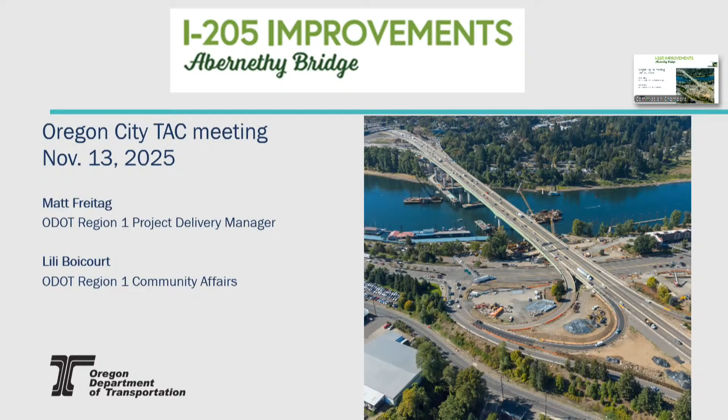So anyway, here is our bridge that we all know and love, the Abernethy Bridge. We've been in construction for about 3 years now, and got a little over a year left, and that's a very familiar sight. I'm going to turn it over to Matt in a second, but I just want to remind everybody the main part of this project is to make the Abernethy Bridge earthquake ready, and that's what all the big machines and all the reinforcement and all the columns and all the work that you're seeing there is really about: that earthquake resiliency.

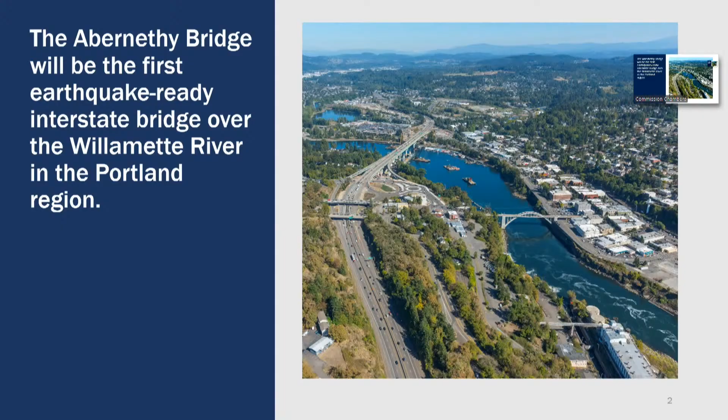Once it's finished, it will be an emergency lifeline across the Willamette River. So this is something that will serve the region in the event of a major earthquake. So I'm going to turn it over to Matt, and he can introduce himself and go through the rest of the project.

All right, thanks, Lili. So yes, I'm Matt Freitag. I'm ODOT's Region 1 Project Delivery Manager. I've been involved in this project somewhat from the start, but as you may know, it was part of our urban mobility office for a while, and now it's back in Region 1, so I've been closely involved with it since about January. So definitely well aware of this.

As far as the project overview goes, recall this is Phase 1A of a multi-phase project, and currently Phase 1A is the only phase that is funded for construction. For all of the improvements on 205, the budget is about $815 million. That includes this work on Abernethy. That also included the early design work to put in the third lane all the way down to Stafford, and then do some other work basically between I-5 and Oregon 213. But again, our current project is the bridge work, and the budget on that one is $672 million. That has just about another year to go.

So funding sources, you may recall, this is House Bill 2017 funds. We also have a mixture of federal and local funds, and then there's some highway tax revenue bonds that are rounding out the funding. This is indeed ODOT's largest construction project in about the last 45 years. We started in '22. We're about 70% done with construction, so we expect it to finish in late 2026.

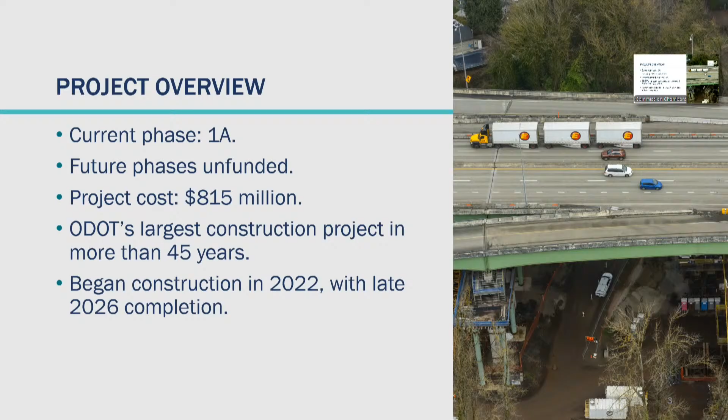Next up. Lili already mentioned the seismic strengthening work. That is indeed the central part of this project. But around that, we are also reconfiguring the on and off ramps on both 99E and Oregon 43. We have the new roundabout in West Linn that was finished in 2023. We're already seeing the benefits of that with fewer crashes and better travel times. We also have quite a few bike ped improvements in both Oregon City and West Linn. I'll get to those here in a bit.

The bridge itself, we're widening it to accommodate a future third through lane, so the full benefit of this will be realized in future phases with the project. With completion of Phase 1A, southbound 205 will have 3 through lanes and the single aux lane across the bridge. So there will be that added lane. Northbound will continue to have 2 through lanes and 1 aux lane across the bridge.

So we will have the wider shoulder so it's ready to go when the adjacent phases are done so that we can accommodate that extra space. We are also building a new sound wall in Oregon City at exit 9, just north and east of the bridge. This was, again, something that the project neighbors voted for. Rounding out the project scope, we also have stormwater treatment, retaining walls, upgraded signing, striping, new sign structures, and illumination.

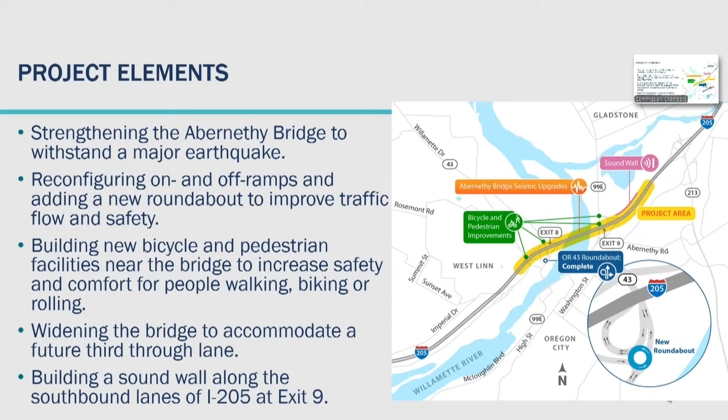So getting to the benefits of the project. We will see, and of course we already are seeing benefits to this project. We'll have the first earthquake-ready interstate bridge over the Willamette River in the Portland metro area. We expect travel will be safer with fewer crashes, with the improved interchanges and on and off ramps, again due to those changes at 43 and improvements to 99E. We also will see improved and safer bike and pedestrian facilities adjacent to the bridge and the interchanges. Reduced highway noise for the project neighbors.

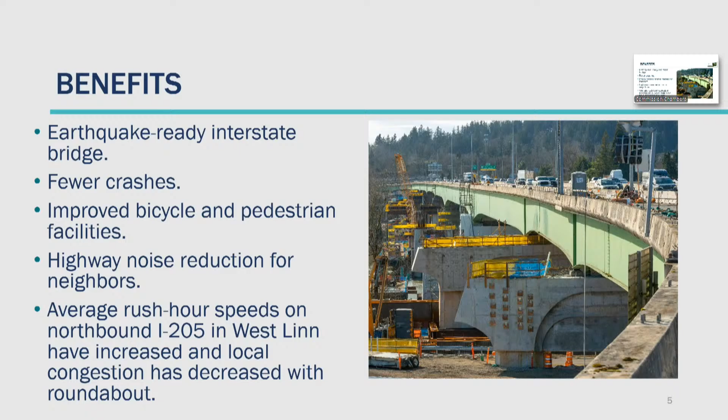And as mentioned about the roundabout, we're already seeing benefits. Rush hour speeds have increased, local congestion has decreased, and we expect certain crashes to decrease about 48%, which we see on most of the roundabouts that we've installed throughout the state. Specific to Oregon City, I do want to focus a bit on improvements and impacts on this side of the river, since we know you have a front seat to this project.

We expect intermittent noise during the day and night that some neighbors in Oregon City will hear. Traffic impacts will continue on 205 and on 99E, Main Street, Clackamette Drive, and the Arch Bridge. We are still working on the sound wall and retaining wall construction, so you can see more of that. Main Street will have an extended closure, up to about a 3-week closure of Main Street just south of 205 near the Subaru parking lot. This is needed to install a new water line on Main Street to tie into the existing water line. The closure may be split up into shorter closures, but that depends on contractors' means and methods.

And then further along, we will have the realignment of Clackamette Drive adjacent to the bridge. Let's see, on to a few more impacts. Soil stabilization. Part of the foundation work to strengthen the soils will help with the seismic resiliency. So that will be subsurface improvements at the east end of the bridge to improve the soil's resilience to a seismic event and to help everything work together.

This is very specialized work, so instead of having our bridge contractor do part of this, we are actually going to let it as a separate contract so we can get a specialized contractor that does this work specifically. We expect it to happen faster, be done better, and hopefully at a better price as well. This is expected to go to bid in the fall of 2026, following right on the heels of the main bridge project. That work itself is expected to be up to about 2 years. It is mostly off the road near Clackamette Drive.

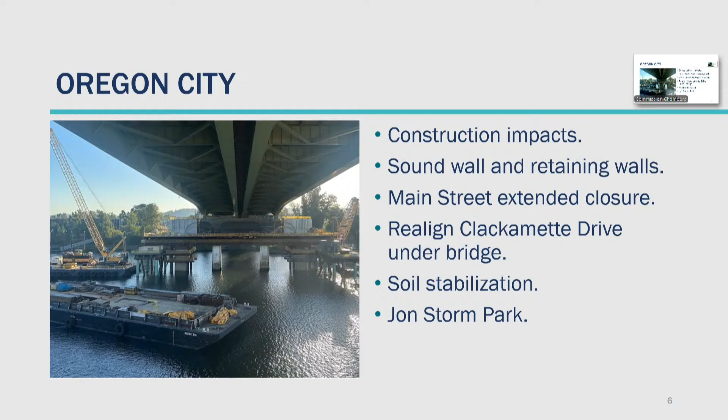So, specific to bike and ped improvements. We're making several improvements in Oregon City specifically as part of this project. Here are the improvements on 99E at the southbound ramps. We will have wider sidewalks, ADA accessible curb ramps, and a new crosswalk across the on and off ramps. You can see right there.

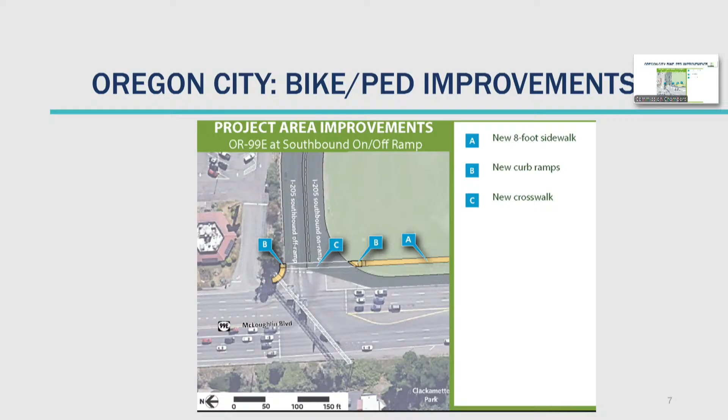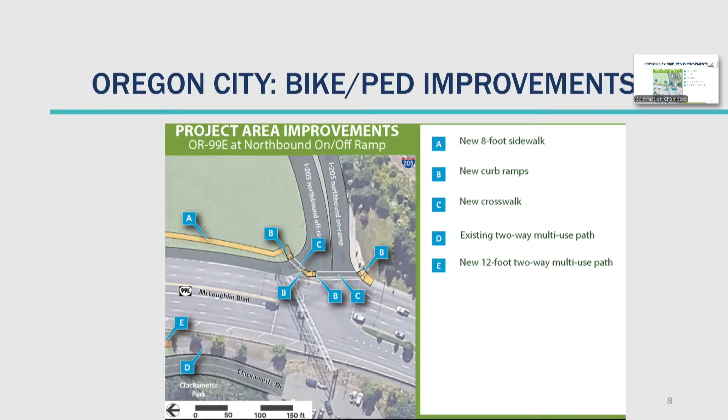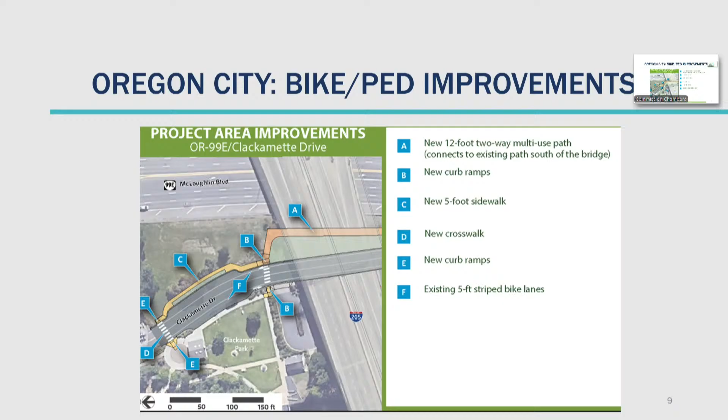So I want to talk a little bit about what we have done. As I mentioned, we're about 2/3 done with the entire project. The earthquake resiliency work includes foundation work and substructure, columns, crossbeams, and new bearings on the bridge. So the substructure and the in-water work is complete. Everything new that's going to be in the river is done.

Now, that doesn't mean we're completely out of the water yet, because we are going to have to go back into the water and remove the existing columns, and then the contractor will have to remove their temporary work bridge. So that will happen closer to the end of the project. But the work that we did do, this was a monumental effort to build 14 12-foot diameter foundations that are 200 feet deep below the surface of the water for seismic stability. These are the deepest foundations of that width in the U.S.

The concrete bridge columns and the cross beams, the main concrete elements holding up the bridge, are 95% complete. Bridge bearings are the interface between the bridge supports and the actual bridge part. That's kind of the key to the seismic resiliency. It helps minimize the shaking. So we've got 250 bearings that need to be replaced. We have done 18 of those so far. Those are proving to be challenging, but we are working with the contractor to figure out how to build those a little bit more efficiently. So 18 out of 250 of those are done.

We're also adding new steel bridge girders to widen the bridge. So 10 out of the 60 are fabricated for those, so they're just getting rolling on that. We have removed the old columns, the existing columns, at several of the piers. But as you can see, we've still got several spots that still need to have the interior piers removed. We finished the roundabout at 43 that connects with northbound 205, and then we've begun installation of the new sound wall on the Oregon City side. You've probably seen some drill rigs out there doing the foundations for those, so we expect to have the posts and the panels ready to go soon.

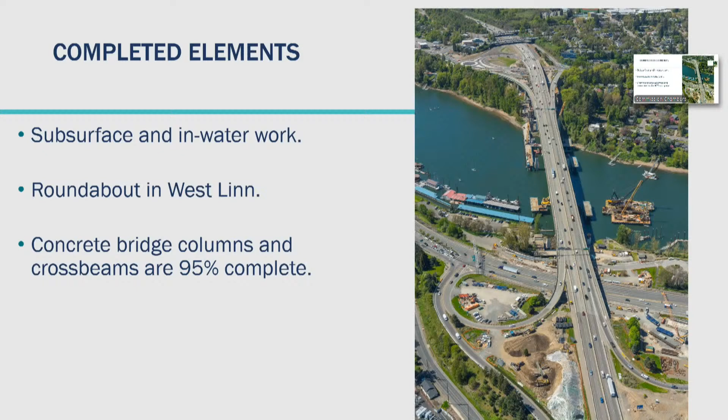So what's left? Only about a third, but it's some pretty big and pretty visible stuff. We've completed the major work by finishing the in-water work. Now we're focused on finishing the columns, crossbeams, girders, and the bearing replacements. We're also getting ready for what we call the bridge slide, where the existing bridge, the main span of the Abernethy structure, will be slid out to make room for the new lanes in the center. We expect that to happen in the spring or summer of next year.

The new sound walls should be finished in the spring, as well as several retaining walls, one of those along Main Street. The aforementioned bike and ped improvements are ongoing. And then there's all the other things like the new sign bridges, the concrete bridge rail, paving, new concrete surface of the bridge, and demolishing the old concrete columns. So those all still remain to get done in the next year plus.

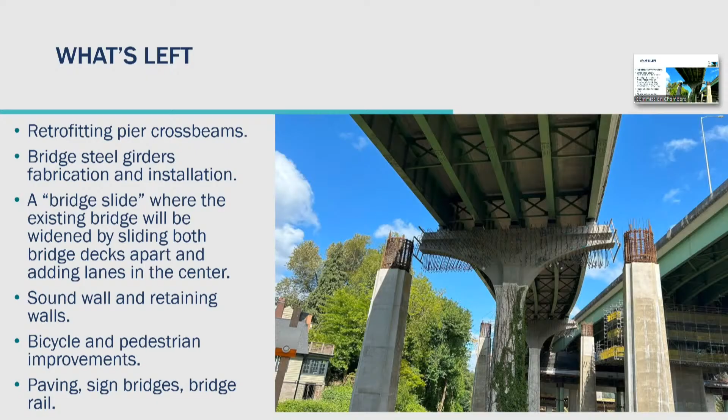So I do want to talk about some of the impacts. We know how disruptive construction can be for travelers and local residents. You see this right in your front yard. Much of the work on 205 has to take place at night when the traffic volumes are lower. However, some of the daytime work is unavoidable. We anticipate more traffic and congestion in the area during construction. So here's the expected construction impacts for this project that remain.

Ongoing nighttime lane and ramp closures along 205, daytime and nighttime lane closures on 43, 99E, Clackamette Drive and Main Street over here on this side of the river. Nighttime closures of I-205 with signed detours for the sign bridge removal. Those are the big signs that are over the lanes of I-205. Two weekend directional closures, one weekend northbound and one southbound. That'll happen for the bridge widening, for that slide that I talked about earlier.

So we will have signed detours. Obviously, anytime we close a freeway, we want to keep most of the vehicles on the freeway system. So we're going to be putting plenty of signs south and north of here, to keep cars on I-5 or on the major routes. We don't want any local detours, but we know some of the shorter detours and some of the local trips will need to be going on to 99E and other highways in the area.

We'll also have short-term sidewalk and crosswalk closures with ADA accessible pedestrian detours. So we expect more of that on 99E in the next month or two. As you've likely seen, the orange and white fencing, we do take our pedestrian detours very seriously. If we're closing down an ADA accessible route to fix it, we have to provide a temporary equal or better ADA accessible route as well.

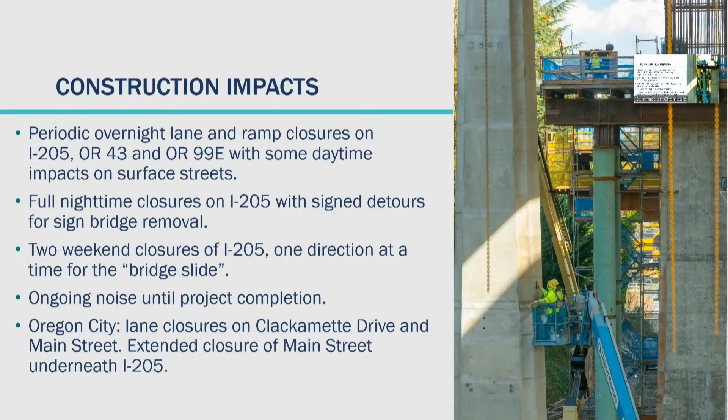All right. So before we take questions, I just want to mention a couple of other projects in Oregon City. So we've got 10 upcoming phases of the ADA curb ramp work throughout Region 1. So that's the entire Portland metro area. Several of those phases include ADA ramp construction in Oregon City. So we've got phase 1 that's currently under construction, has several ramps on 99E at 12th Street and further north. We know this is causing impacts on 99E more than typical, but we should be done soon in that section.

Phase 4 is going to go into construction in 2027. That'll have ramps on 99E at 2nd Street and south through Canemah. Phases 9 and 10 are just in the early stages of design, so construction will be a few years out, but that will have more ramps on 99E throughout Oregon City. We certainly know that when it looks like construction, we've got a massive project like the bridge work, we kind of wonder, hey, is it all in the same spot?

And we do have other projects going on, so we try to keep those somewhat separate, but we know to the traveling public, they don't care who owns the cone or which project it is, it's work being done. So we do want to make sure we point that out, that we are working with those contractors and construction teams to make sure that those impacts are appropriate for the level of effort there. But again, the ADA ramps are pretty darn important, so we take those seriously, and we know that it's going to be some lane closures and impacts to get those done, but the end result will be a much more complete system with accessible routes for all.

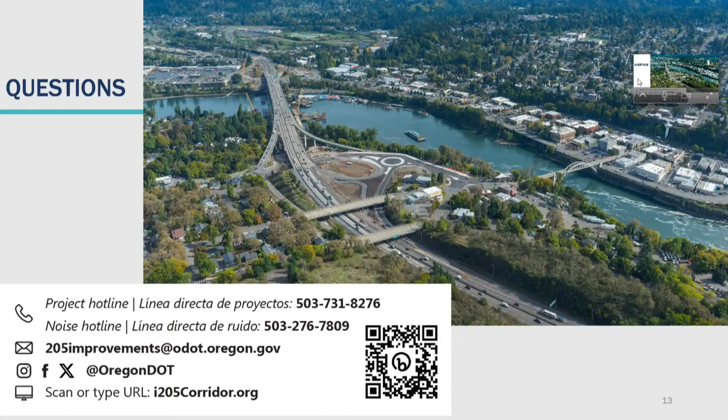What was the choice for the sliding versus just adding on a side? Sorry, I don't have the full details on that, but my understanding is, yes, we're widening with more of a typical way to widen. We're putting new girders on the outside and widening the deck. The main span, those massive existing girders that span all the way across the river, have so much capacity in them that we can hang more things off of them and they will still hold up the bridge. So we slide those over, and you've seen the angle brackets on the outside, so we're going to be hanging stringers on there, smaller steel members to widen the deck, but the main piece can hold that extra weight.

So instead of fabricating new massive girders to get all the way across there, our designers looked at it and figured out we could widen the pile caps, the foundations, slide the bridge over, and then hang the other parts off of it. So yeah, that was the first question I asked too, like, why aren't we just doing this the easy way? But it isn't necessarily the easiest, and it would certainly not be the cheapest. So we've got a very unique situation here, where the existing bridge is in many ways stronger than it needs to be, or has excess capacity. So we're making use of that capacity to save quite a bit of effort on the project.

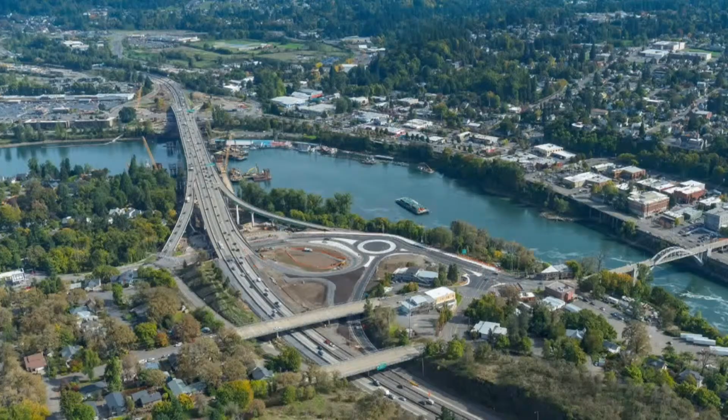And the existing interior columns, those are being removed? Yeah, so we've already cut those off. The contractor came through, and if you look real close, you can see there's about a 4-inch gap in between them. So those are no longer supporting the bridge because we've got the new massive columns on the outside and the new pile cap. And so then those interior ones will be removed. It's up to the contractor on the timing. On the West Linn side, they've already removed some of them because they're in the way of future stages on the existing bridge, but many of the other ones are still there. So certainly in the water, we still have to get those out as well.

I have a question. Originally in the early plans, before everything started, there was going to be a second roundabout right in front of the gas station there, on the off ramp onto Willamette Falls Drive. And that's still a huge bottleneck. Any plans on relooking at how they're going to keep the flow going there? Because it's almost impossible to get out. Yeah, I think that would be a future phase. So no immediate plans to work on that. But as far as looking at the entire corridor, figuring out where the traffic is and how do we make it function a little bit better, that's certainly going to be on the table as one future phase option.

I see some work being done, I guess, in Oregon City. Are you guys also going to be building infrastructure for the tolling there? We have no infrastructure going in for tolling. We do have new sign bridges going in for either signs or for ITS, Intelligent Transportation Systems. So those variable signs you've seen elsewhere that either have the temporary speed reductions in front of congestion or just messaging signs to give travel time and other warnings. So we are putting in more sign bridges for that.

But if something happens down there, you would have to go and add that infrastructure later on? If somebody decides to toll, that would have to come afterwards and be retrofitted? I would assume so. As you know, when House Bill 2017 was passed, the agency was told, hey, figure out tolling. And so we went down the path to start doing that. And then the governor put a pause on that. So we have no immediate plans to do any tolling on this or any other.

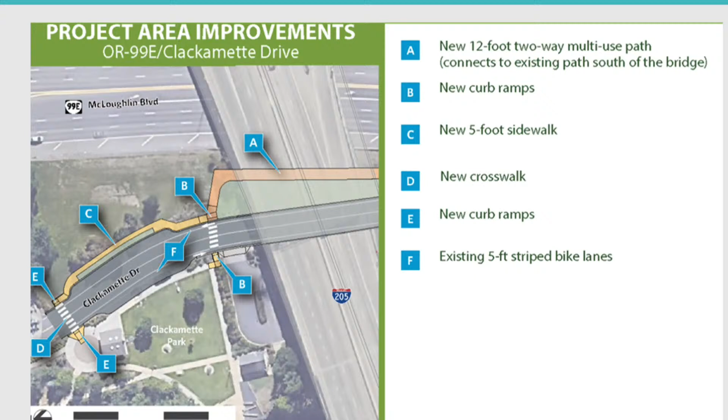I'm looking at slide number 9, but you're all probably familiar with the section. It's on the west side of 99E. There's currently a temporary path for pedestrians and bicycles. It's a multi-use path that's been installed there just by putting up some jersey barriers. And it's a nice little cut through to be able to go through there safely if you're walking or biking. And there's no way for the cars to get through the jersey barriers, so you're pretty well protected in that route. And so I'm wondering why it's not just remaining on the map as a permanent improvement to 99E.

Are you talking about 99E or Clackamette Drive? 99E underneath the bridge? There's a path currently that goes underneath the bridge. Gotcha. Yeah, you can see the alignment there. It's not labeled on the map, but it would be where that A is pointing, along the shoulder of 99E.

And I don't understand why ODOT plans to remove the jersey barriers and remove that path, which provides a second option for people to walk or bike along 99E. It's shorter because you don't have to go all the way around the hotel. And it also has slowed down the traffic. So it's just a nice little feature that ODOT could save some money by not bothering to remove all those jersey barriers. A cost-cutting measure as well for you all.

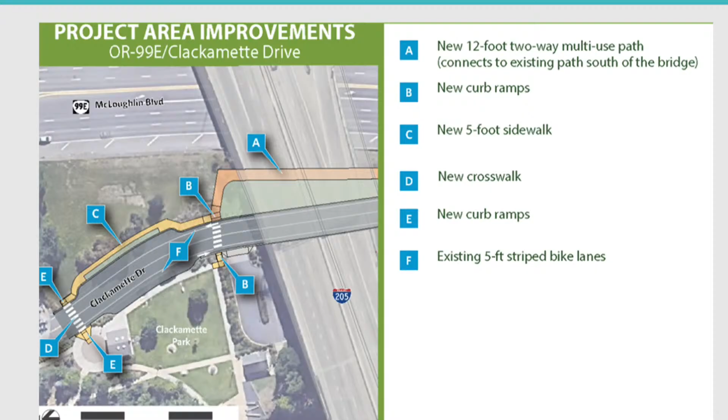Yeah, I'll need to look into that. I'm not quite sure on the details right there as far as what we're looking at for the final condition. I think we're effectively looking at putting 99E back to what the pre-construction condition was. Okay. You're saying that having that positive separation is a positive thing?

Yeah, and I actually emailed, just as a private citizen, not as a TAC member, the Abernethy Bridge Project and got a response from Jessica Ball, I believe her name is. And then Kelly Ball and Paul Scarlett. And then I asked some follow-up questions like, what is the rationale in removing the jersey barrier? Because you've always thought of it as a temporary structure? Yes, but why does it have to be a temporary structure? Why can't we make it permanent? And I never got a response from ODOT to my follow-up questions.

Gotcha, we'll check that. When did you last send? I could forward you the email. It was back in August when I was asking these questions, and they just kind of moved on to other things and didn't answer my questions anymore. But there's a whole stream of emails with me and Jessica and Kelly. Okay, yeah, they're all part of our PI team. I'll take a look at that and dig that back up and resurrect the conversation. Thank you.